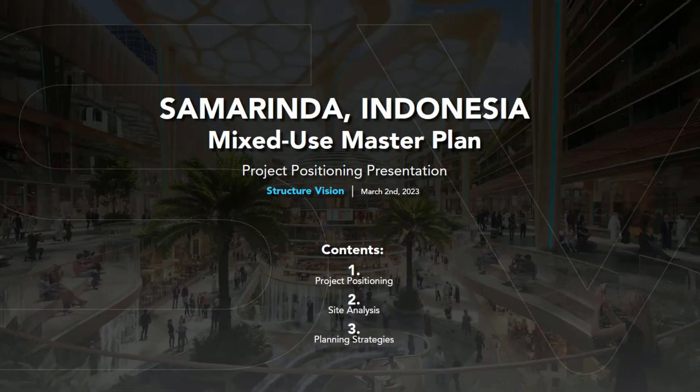So it's in Samarinda, Indonesia, mixed-use master plan. This is a project positioning presentation with Structure Vision, March 2nd. The contents are positioning, analysis, and a little bit of strategies.

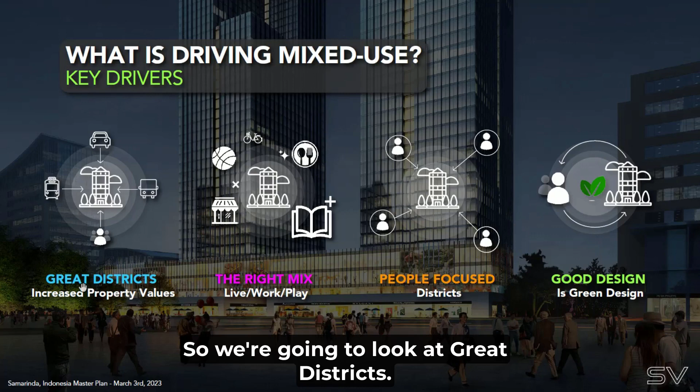So what's driving mixed use? Key drivers—we always do this on all of our projects to set the tone and the positioning for the work globally and locally. We look at great districts, what makes great districts: the right mix, function, people-focused districts, and good design is green design.

For great districts, basically what you want to do is attract as many humans as you can. On-site, you want to retain the on-site population, drive foot traffic, increase sales, increase revenues, and ultimately for the owner this is how you get better land value—by placemaking, bringing people in and attracting humans, and then the land value goes up. We're always looking at this in terms of master planning.

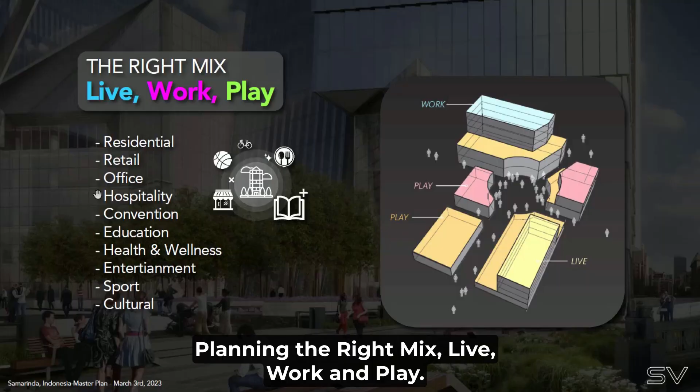The right mix: live, work, and play. This is talking about the functions of the master plan. When you get good synergy of functions together, then you get additional value. It's almost like something growing, like a plant, where it needs light and the right conditions, water, nurturing, and then it starts to grow at an even faster rate than before. Some of these functions we might look at are residential, retail, office, hospitality, convention, education, health and wellness, entertainment, sport, and cultural. So we're looking at what is the right mix of these functions.

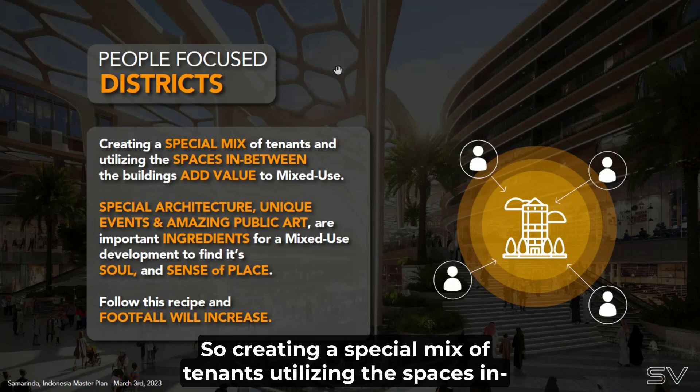People-focused districts—this is something that's kind of special to design. It's like added value when you lay out and organize the master plan correctly, the spaces in between the buildings. Creating a special mix of tenants, utilizing the spaces in between the buildings, adds additional value to the mixed-use project. Special architecture, unique events, amazing public art—these are all ingredients of a mixed use that establishes some kind of soul or sense of place.

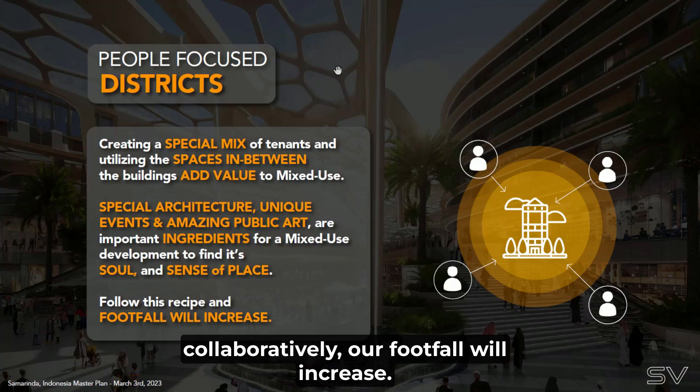If we do this collaboratively as a team, our footfall will increase. Ultimately our value will increase.

Good design is green design. On all of our projects we're looking at some kind of sustainable certification. It's actually great marketing also—if you certify it, you can then use that in the media and all your promotion. It's LEED certified, LEED gold, LEED platinum. I'm sure Indonesia has their own certifications, but because I'm American, we normally use LEED.

And then biophilic design—this is something that's kind of a newer trend. It's been around for a while, but it's the biophilia, this part of the human and nature and how we interact with nature, those good sensory qualities, the good internal elements our body releases, these good chemicals when we're in nature. So environmental features, light and space, place-centric relationships, evolved human relationships to nature, patterns and processes, and shapes and forms.

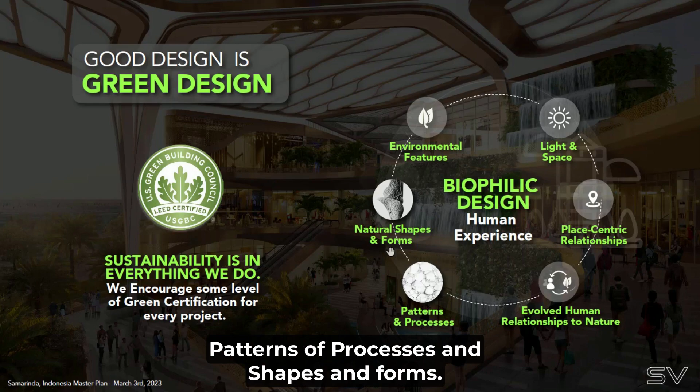In terms of the size, 400 meters wide, 850 meters deep. It's 3 plots: this HGB 2 is 17,400, HGB 501 is 134,000, and the rear one is 130,000—combined they're about 280,000 square meters. So it's a big site with a lot of river frontage, which is really nice.

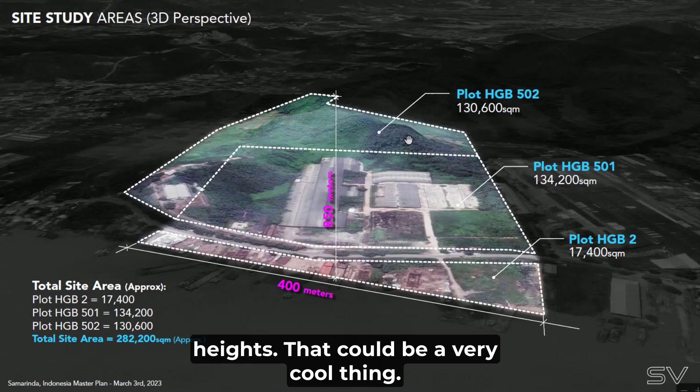That could be a very cool thing. We always look at a couple global case studies because we want to know what the current trends are around the world in terms of master planning. We're constantly doing this work, but we're always also constantly checking in on what's the cutting edge design.

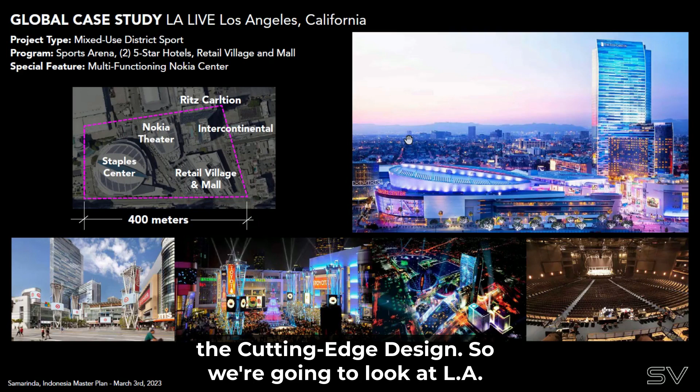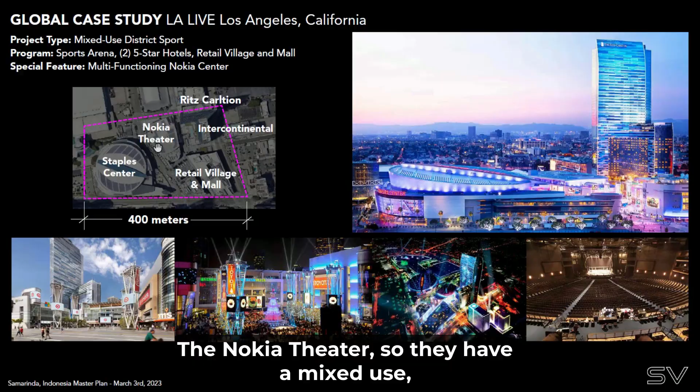So we're going to look at LA Live. It's very commercial, it's the Staples Center where the Lakers play, and this was an urban growth project, a catalyst for growth. It was in a poor neighborhood. They put the Staples Center there, and then ultimately there's two hotels, Ritz-Carlton, Intercontinental, and when you get competing brands, it also synergizes the place and adds additional value. The Nokia Theater, a mixed functioning theater, and then retail all throughout. So you can see these are the kinds of elements and components that create added value.

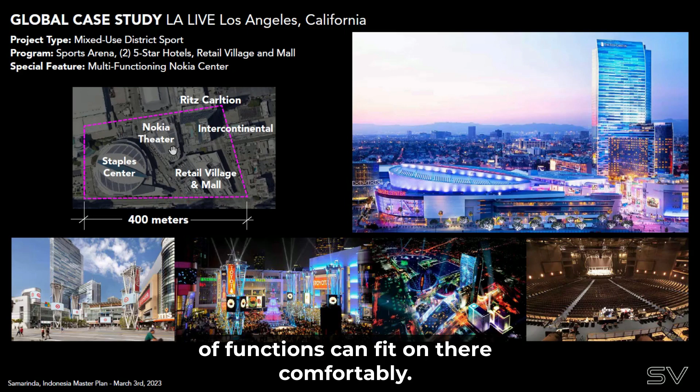And in terms of the size, 400 meters wide, so that's about the width of our site, but our depth is 700 or 800 meters. So you can start to scale the work too. Let's see what kind of functions can fit on there comfortably. It's a good exercise for us to do.

In terms of some planning strategies, we're just looking at this from a very broad frame of mind, and we'll later get into more detail. Obviously we need the help of the client and collaboration in fine-tuning the brief, but we just wanted to share a couple ideas that we're thinking about that could work. So very early ideas - what mix of functions do we select here?

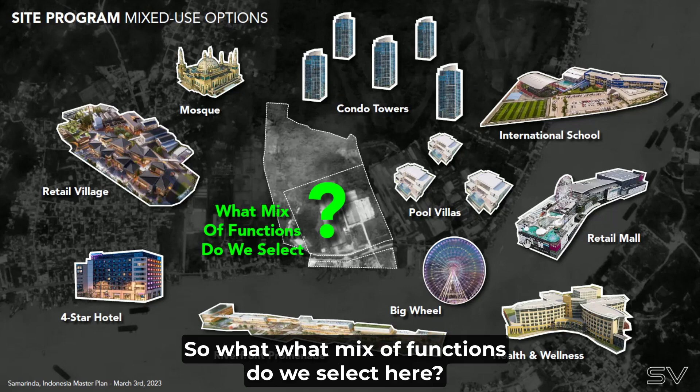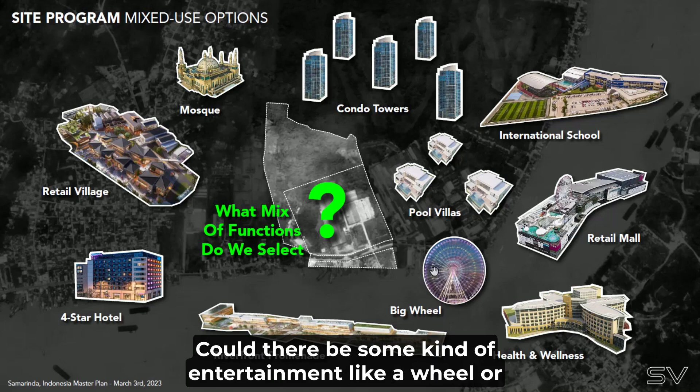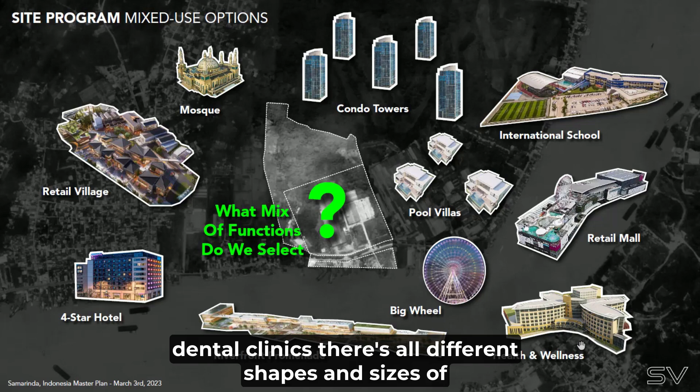We just made a collage here of condo towers, a mosque, community center, retail village, 4-star hotel, riverfront promenade. Could there be some kind of entertainment like a wheel or some small level of attraction? Health and wellness, medical, dental, clinics - there's all different shapes and sizes of health and wellness. Retail mall or is it more retail village? Pool villas, it could be a mix of residential, and then the international school or some kind of school component could be in there.

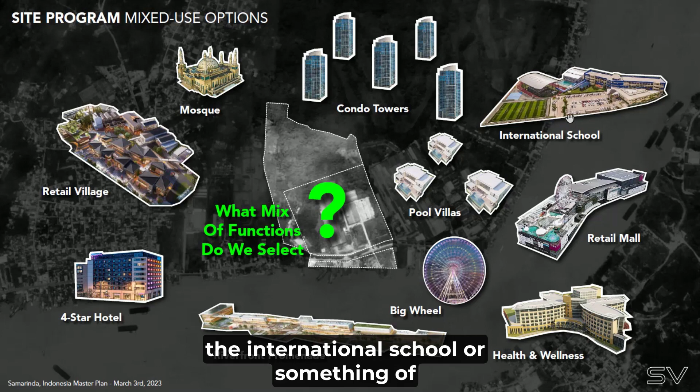So we want to select what the right mix is to make the most value and have the highest return on investment for the owner.

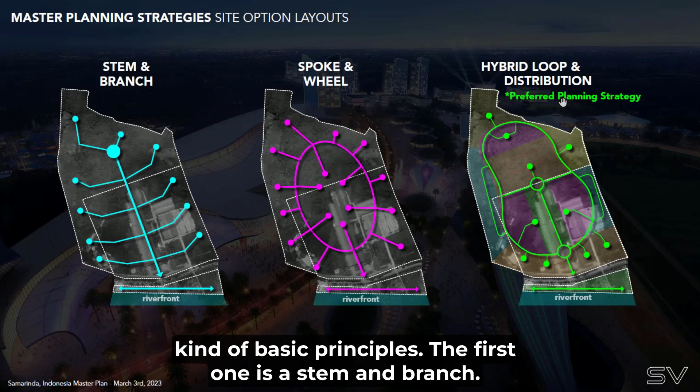We did a quick master planning exercise here with just some basic principles. The first one's a stem and branch, it's kind of an organic way, it's very typical of laying out subdivisions - you have these cul-de-sacs. The thing is, it creates a lot of dead ends, and so with this big site, it's probably not the best one.

The second one is spoke and wheel. A lot of aviation and airports use this, where you have a spoke and then a wheel, and you distribute off of it.

This could have a big loop, but once again you have some dead ends there. So the third one is like a hybrid between the two. We kind of laid out a loop, and then there's also kind of a stem and branch. But what happens here is you can zone the project much better.

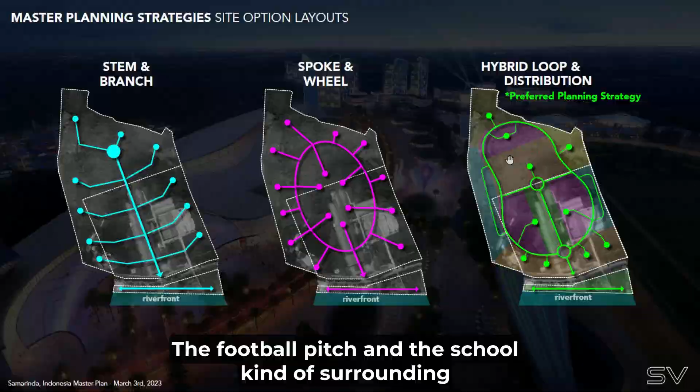You can put the emphasis on this axial area in the center with a retail village, condos. You could have an education anchor sit here with a football pitch and the school surrounding it, almost like an arena. And then you have high-end luxury condos or mid-level condos, very inexpensive ones up to a middle level, up to a high level. Then you're covering all of the market, which is nice. And of course, take advantage of the riverfront.

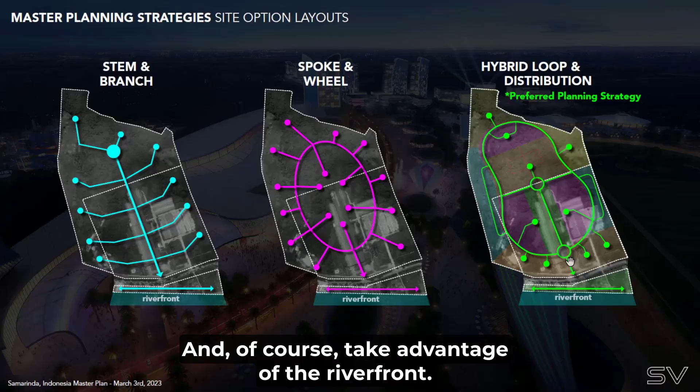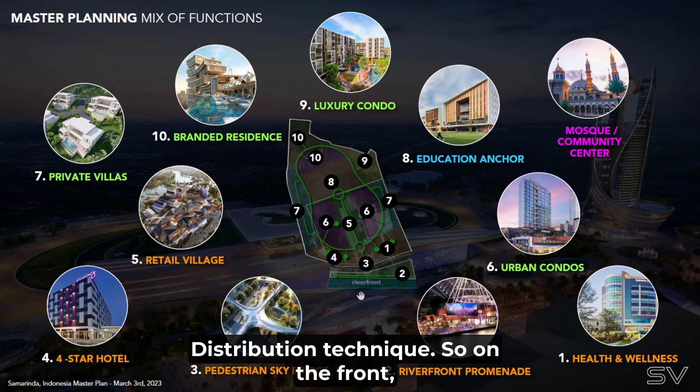So this is just a mix of functions that we think could go in there, that could fit nicely with this general scheme of the loop distribution technique. On the front, where the road is, you're going to want commercial elements, and those can either be developed by the owner, or you could partition those off and have a partner come in and either build it or just operate it.

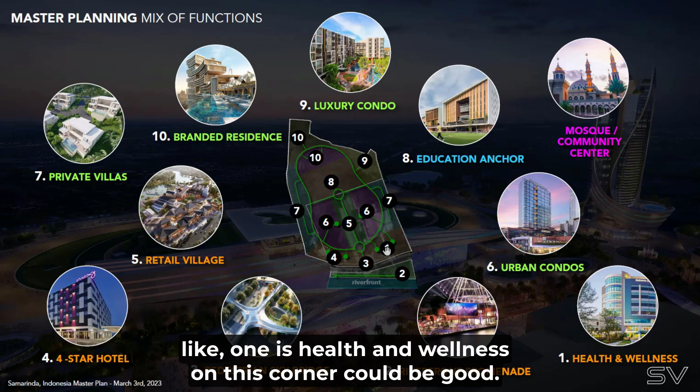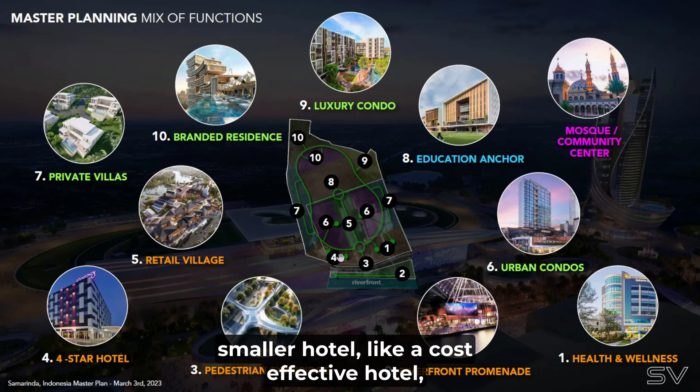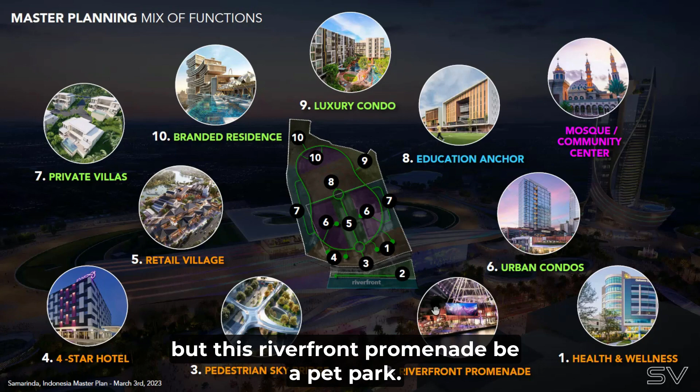And then you probably have some kind of sky bridge, some kind of link between the riverfront and the property itself, because we want to take advantage of that. We know the river has some pollution, but this riverfront promenade could be a pet park. You could have bicycles, scooters, push scooters, children's play, a little bit of food and beverage, maybe a cafe or restaurant over there as an anchor.

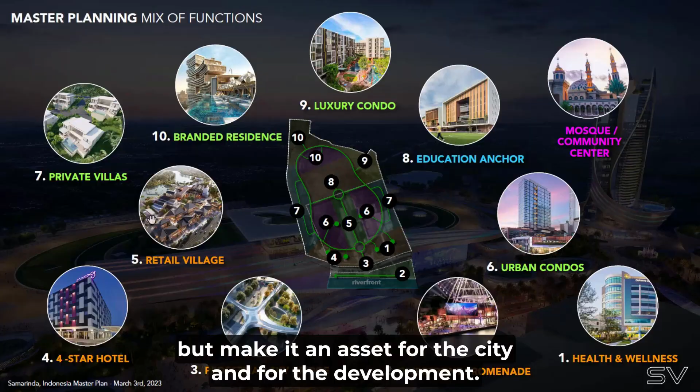But that could have a whole mix of lower cost, not huge development, but make it an asset for the city and for the development. Number 5 is a retail village, kind of a 300 to 400 meter long high street. Personal services, cafes, English centers.

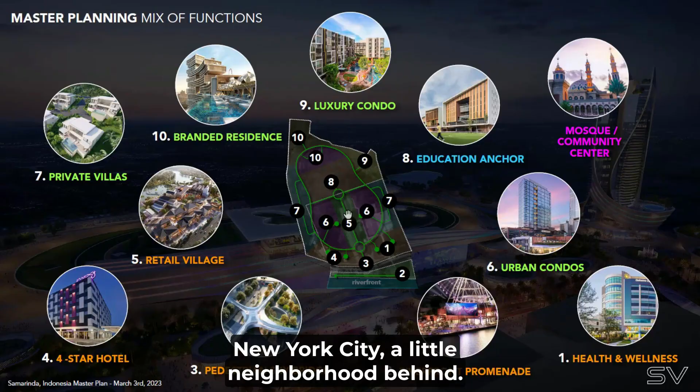It could be a mix of things, almost like you're in a little New York City, a little neighborhood. Behind it is urban condos, either low rise or mid rise. They're probably not super tall, because we have so much land. We don't have to go tall, and taller is more expensive, so we just go mid rise. Make that very urban - this downtown area is kind of urban.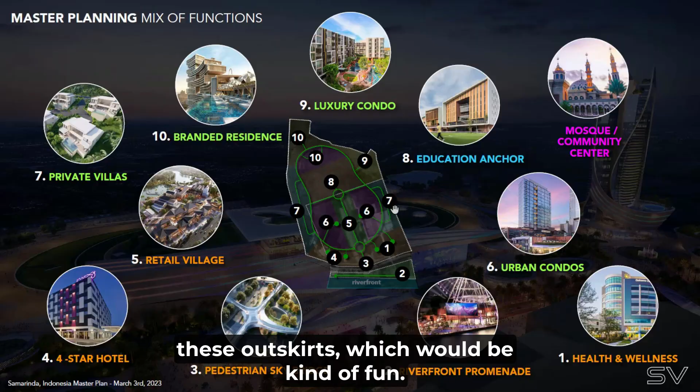On the outskirts is more like villas. We could have private gated community villas on these outskirts, which would be kind of fun. You want to make sure you hit all the different markets of what people may want. And when you get this mix put together in a nice organized way, it starts to feed off of each other and add additional value.

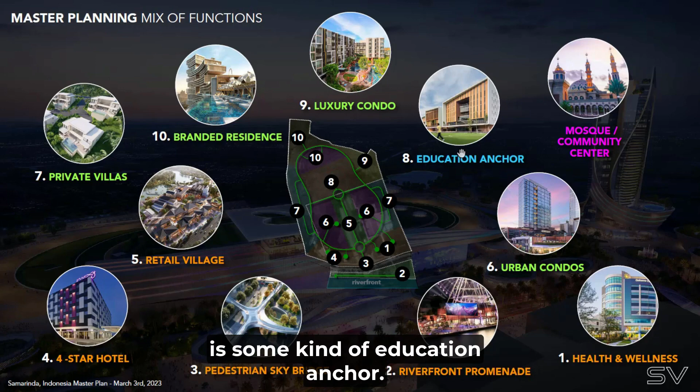Number 8 is really what makes this thing work - some kind of education anchor. Whether it's from kindergarten all the way through high school, or maybe at first it's kindergarten through middle school, you let it fill up, and then you add on the high school after 3 or 4 years once it fills up.

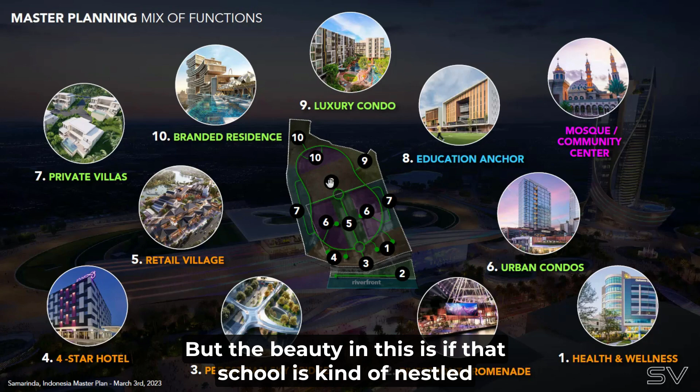But the beauty in this is if that school is nestled there and we have mountains around it, you can get these really cool luxury condos at different levels - low, mid, and high. So this condo up here is a branded residence. It's kind of a cohesive approach.

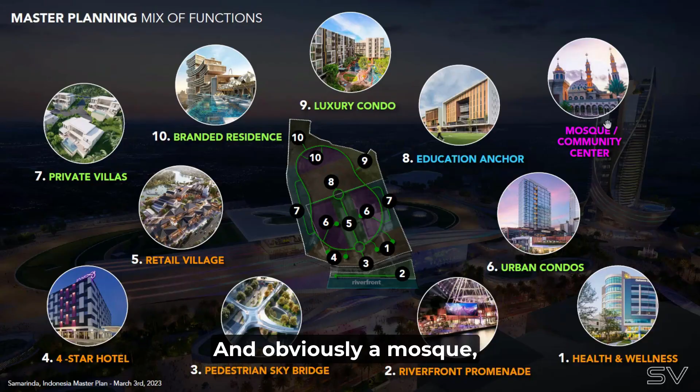And obviously, we at Structure Vision want to work with the owner, modify the brief - anything that doesn't work, cancel it. But we need to get something on paper to have discussions about, and it's the collaborative way that we like to work. And obviously, a mosque, some kind of religious program or a little community center.

It could fit anywhere on the site and look really beautiful, very photogenic, that master planning bird's eye look - the mosque illuminated with the condos, the school. We think that this project could be pretty cool.